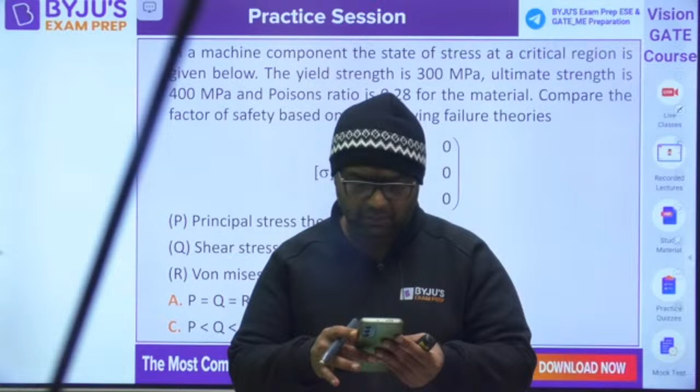Okay guys, so this is the very first question. And this question is saying guys, yes Darshan. Okay, this is the very first question.

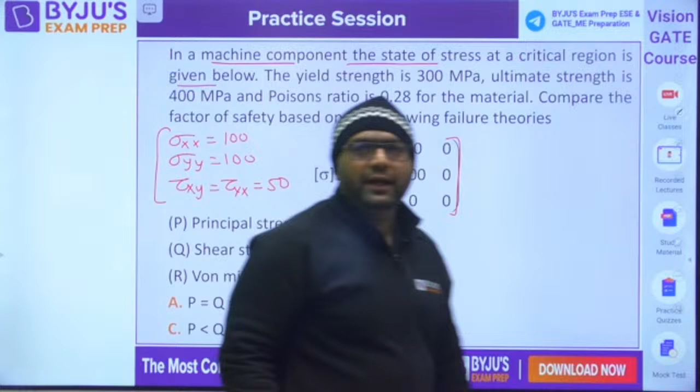In a machine component, the state of stress at a critical region is given below. This is the stress tensor given to you. From here you can say sigma xx is equal to 100, sigma yy is equal to 100, tau xy is equal to tau yx is equal to 50. This is given to you. Poisson ratio is 0.28, SYT is 300, SUT is 400. Compare the factor of safety based on the following theories of failure.

So solve this question. In this case, sigma 1 is 100. You are saying sigma 1 is 100. Let me check, I have solved it for you.

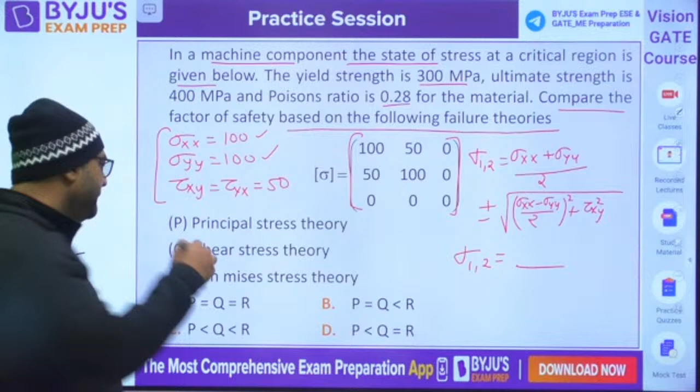No Darshan, Rishabh, your answer is not correct. Because here sigma xx and sigma yy are 100. So you need to find out sigma 1, 2 by the formula, which is nothing but sigma xx plus sigma yy by 2, plus minus square root of sigma xx minus sigma yy by 2 whole square plus tau xy whole square. When you solve this, you will get the value of sigma 1, 2, and once you get these values, you can check the factor of safety for all three theories of failure. Just try to solve it, this is a wonderful question on theory of failure where they are going to check you on all theories of failure at once: principal stress theory, shear stress theory, and von Mises theory. So very easily you can answer it.

Yes, solve it guys. Solve it, solve it, solve it.

Everybody, if you get principal stresses, you will get the answer very easily. You need to understand: if principal stresses are of same nature, then MPST and MSST become the same. So if MPST and MSST become the same, their factor of safety will also be same. So you just need to check.

Yes, like Vinay already answered, you are going to get sigma 1 comma 2 as 150 and 50, and you can see they are of same nature. Same nature of principal stress indicates the same result for MPST and MSST. It means factor of safety coming from MPST and MSST is same. So P is equal to Q. Either answer is A or B. And if you know something about von Mises, you can directly answer from here.

Very good, guys. Very good, very good, very good.

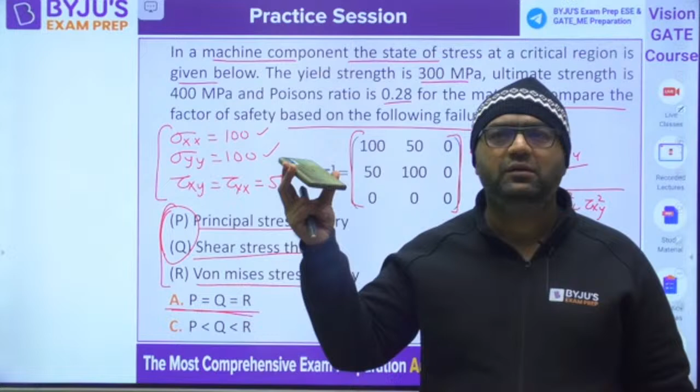Please tell me, B is the right answer. Okay, so the answer would be B.

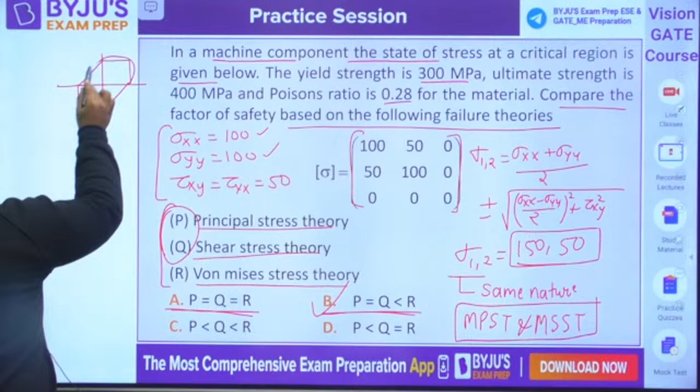Why B, my dear? Because when we talk about the von Mises theory, going for the theory of failure, MSST comes out like this, and when we make MDET, it comes out like this. So you know MSST is safest but uneconomic, and MDET is the economical theory. So the factor of safety when you find it out with MDET, it will give you a value of 2.26. And when you find it out from MPST and MSST, you will be getting 2.

So the answer is going to be B, because the factor of safety, I feel, is going to be more than 2. So whenever we talk about R, it will come out to be more than P and Q. Is it clear for everyone? Yes, very good. So guys, the answer will be B for this.

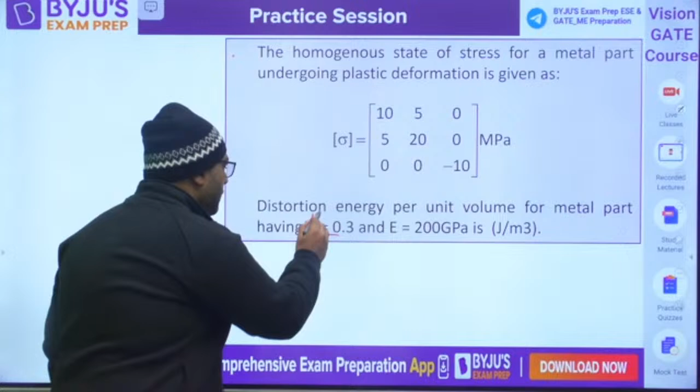Moving to the second question, once again from theory of failure. This time the question says the homogeneous state of stress for a metal part undergoing plastic deformation is given like this. This is the Poisson ratio and this is the Young's modulus, and they are asking for the strain energy, distortion energy per unit volume. So the formula for distortion energy per unit volume is 1 plus mu upon 3E.

If you don't remember, here it is: sigma 1 square, sigma 2 square, sigma 3 square, minus sigma 1 sigma 2, minus sigma 2 sigma 3, minus sigma 1 sigma 3. This is the formula. And if you are talking about sigma 1, sigma 2, sigma 3, you need to find out sigma 1 and sigma 2. But in the third plane shear is already 0, so that itself is sigma 3. But sigma 1, sigma 2 you need to calculate by the formula.

So sigma 1 comma 2 will be sigma xx plus sigma yy by 2, plus minus square root of xx minus yy by 2 squared plus tau xy squared. So from here, you know sigma xx is 10, sigma yy is 20, by 2 plus minus square root of 10 minus 20 by 2 squared plus 5 squared. So from here you would find out the principal stresses. Solve it and get the answer.

Solve it and get the answer.

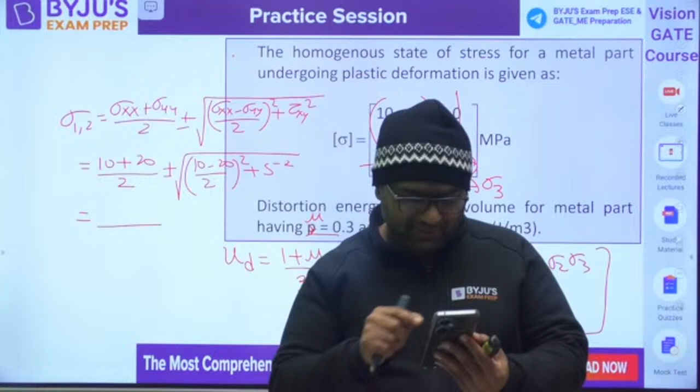Because at night, we are meeting here in the winters. This shows your and my dedication, and with that dedication we are going to crack the exam very nicely.

Okay, 22.07 you are saying, dear, not correct. Okay, you are giving the principal stresses value. Are you giving principal stresses value as 22.07?

Yes, Shreyas. If you are saying principal stresses, then maybe you are correct. Tell me guys, fine, then fine. Okay, one value you are getting is 22.07. What about the other?

What about others? Okay, the second value is 7.93. Then the third value is -10. Use the values, get the answer.

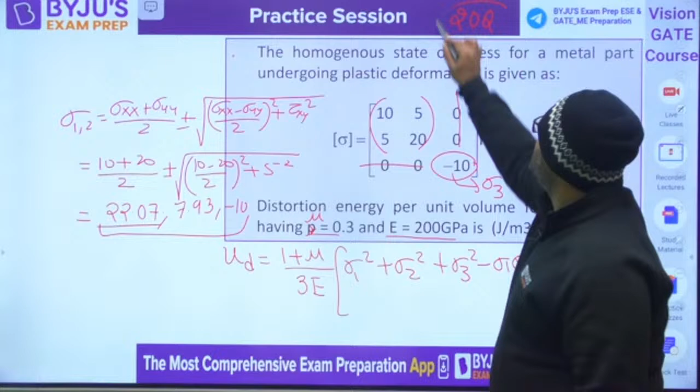We have questions from all the chapters, in the sequence of the chapters only. First theory of failure, 2 questions. Then fatigue loading, 2 questions. Then joints, bearings, and theory of machines questions. We will have 20 questions total tonight. So just solve it and get the answer.

So we have sigma 1, sigma 2, sigma 3. Just put the values to get the distortion energy per unit volume. This is how you will be solving it.

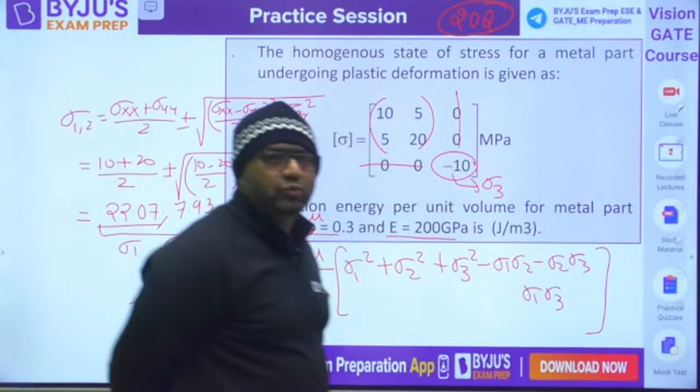The answer is correct. 1679 joules is correct. Okay, Ram Yadav, in my Telegram channel, just 2 days back I have taken the machine design marathon. There I have given all the formulas. You can just download that PDF, you will get that. Okay, fine, still if you want, I am writing 2 formulas.

Total strain energy per unit volume was 1/2E times sigma 1 square, sigma 2 square, sigma 3 square, minus 2 mu times sigma 1 sigma 2, sigma 2 sigma 3, sigma 1 sigma 3. This was the formula for total strain energy per unit volume. Distortion energy is 1 plus mu by 3E, which I have just written. But this has many formats. In the marathon session, I have written all the available formats, so you can go for that.

Fine, moving further, guys. Very good, 1679 is correct. This is fatigue loading chapter. It says a rotating beam test specimen when loaded to a stress of 900 MPa gives a life of 1000 cycles. So you know the S-N diagram. Everybody knows the S-N diagram. This question is from the S-N diagram.

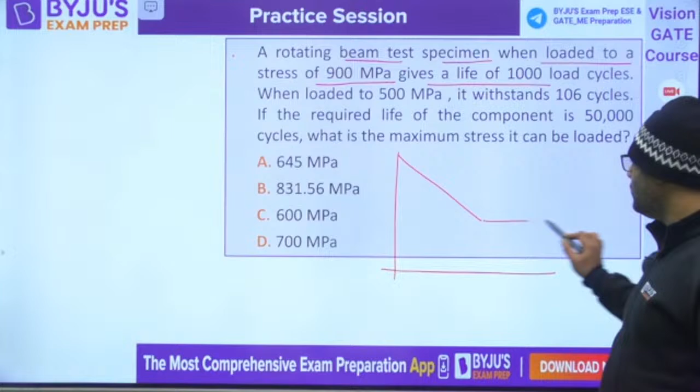So if you remember, what was this? This was log base 10. They have given 900, put direct values. This is 3, this is 6. And they have given when loaded at 500 MPa, 10 to the power 6 cycles. So this is 500.

Log base 10 of 500. And they are asking the stress for the life of 50,000. You need to find out this. Log base 10 sigma. If this is log base 10 of 50,000.

Solve it and get the answer. Solve it and get the answer. You know what you need to do. This is A, B, C, D, E.

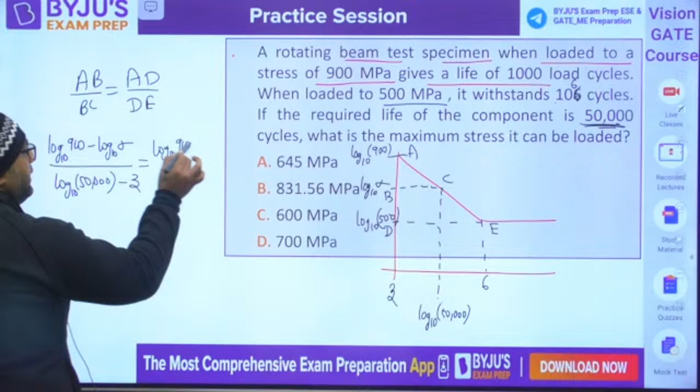You will go for similar triangles. You will write AB by BC equals AD by DE. So AB is nothing but log base 10 of 900 minus log base 10 of sigma, divided by log base 10 of 50,000 minus 3. It equals log base 10 of 900 minus log base 10 of 500, divided by 6 minus 3.

So this will give you the value of sigma. This will give you the value of sigma. So the answer comes for sigma as 645 MPa. That is correct, very good guys. I am very happy that in the very beginning you have given the answer. Shreyas, very good. Wonderful. 645 MPa is correct, very good Ram Yadav.

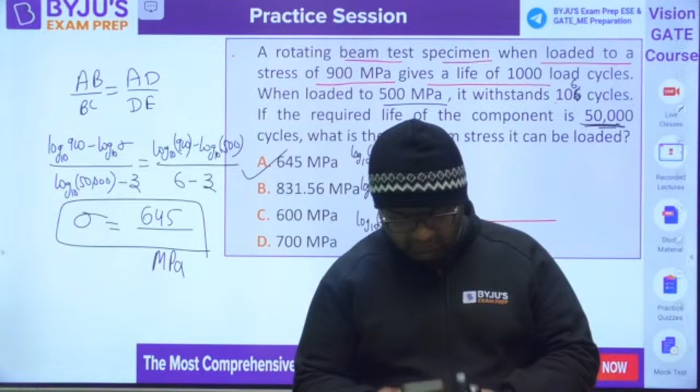Yes, very good. Answer is correct, guys. Moving to the next question, guys.

This is one more question from fatigue loading. This question is saying a steel component has the following: ultimate strength, yield strength, surface finish factor, size factor, reliability factor, concentration factor. Find out the endurance strength of the component.

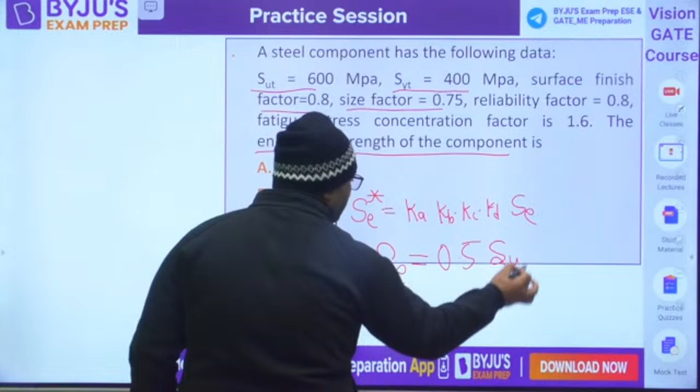I would like to tell you guys, they have asked you the corrected endurance strength. Corrected endurance strength is given as Ka times Kb times Kc times Kd times the endurance strength. And endurance strength, if not mentioned for steel, it is 0.5 times of ultimate strength. So this is for steel, okay? So you can use it and all other factors are given to you.

And you know Kd is nothing but 1 upon Kf. Kf is the actual stress concentration factor. Actual stress concentration factor. Solve it and get the answer, guys.

Wonderful. Okay, so Rohan is saying 144. What about others? I feel there is a scope of improvement. Vinay is saying 90, very good. What about others? Shreyas is also saying 90. Yes, 90 is the right answer.

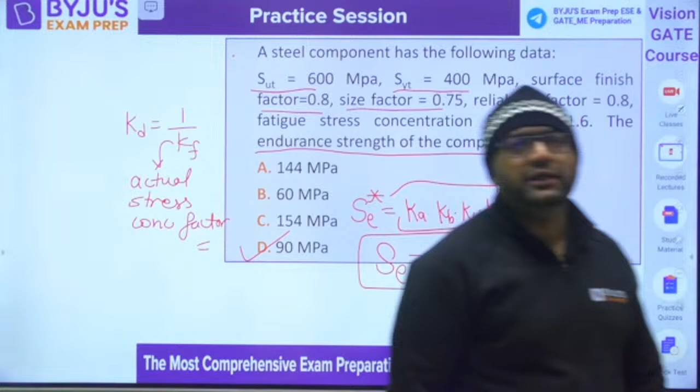Okay, if you remember, I told you all factors are less than 1. All factors are always less than 1. They are never going to be more than 1. Very good, Darshan. The answer is D, which is correct. Very good. So moving further, guys, to the next question.

I feel now one question should be from Miner's rule. I have not taken the Soderberg-Goodman because that question we have already done in the class. So the life of a machine component under heavy test was 10 hours. So you know that capital N1 is 10 hours.

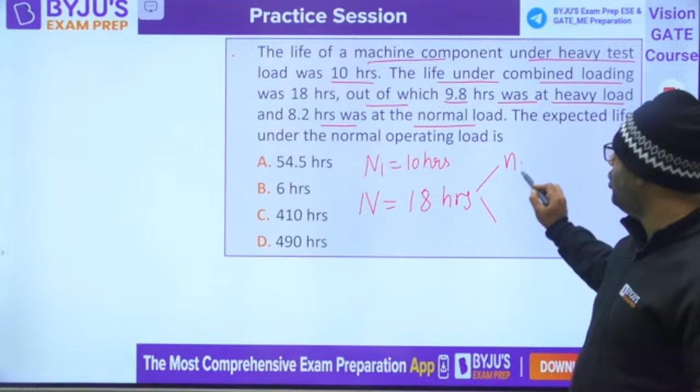The life under combined loading was 18 hours, out of which 9.8 hours was at heavy load, 8.2 hours at normal load. So they are saying the total life N is 18 hours, out of which small n1 is 9.8, small n2 is 8.2. So you just need to write one thing, that is n1 by N1 plus n2 by N2 is equals to 1.

Okay, so small n1, small n2 are known to you. You need to find out the capital N2. This is cumulative fatigue failure or Miner's rule. This is a new type of question which I have never asked in the GATE paper. So you may get this time, GATE 24, this question. Try to solve it.

And after this question, we will move on to the rivets, riveted joints. Tell me guys, I have taken 2 questions from riveted joints.

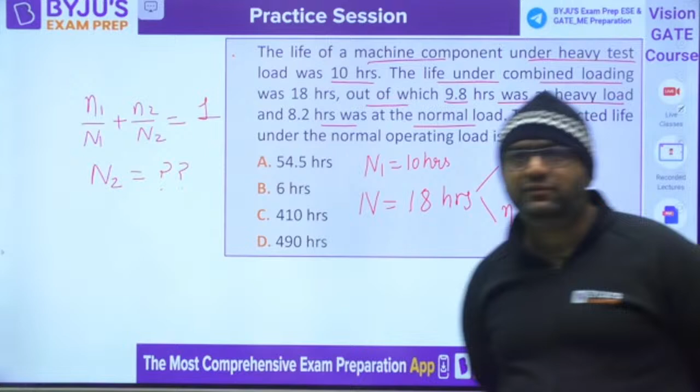Okay, Vinay is saying C, 410 hours. What about others? Very good Rohan, very good Shreyas. 410 hours is correct. C is the right answer. So N2 will be coming out to be 410 hours.

Moving to the next question guys. This is riveted joint. I told you generally 2-3 rivet configuration can also come. So one question from 2 rivet configuration. Next will be for 4 rivet configuration.

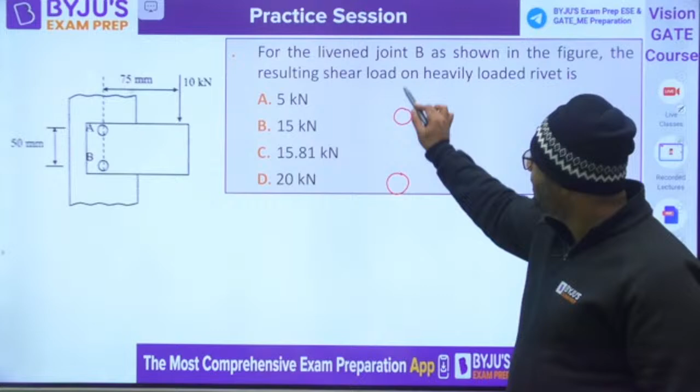Okay, so here my dear, you need to solve it. You know what to do, what are the steps. So this is rivet number 1, this is rivet number 2. This is the row of rivets, the gauge line. And you know when I will be making the load, it is acting here.

So I will be making one load here, other load here. This and this will be making a couple. So finally what I will be having, I will be having one force and one couple. Force will be of 10 kilonewton and couple will be of 10 kilonewton into 75 mm.

Now you know what to do. Primary forces, secondary forces. I feel everybody knows what is primary force. It is going to be 10 by 2. So there is no problem with the primary force. You need to find out secondary.

You know what is the procedure to write secondary. First of all, primary will be nothing but acting like this. For secondary, the procedure is radius perpendicular. So for that, I would be going like this. This is the centroid. So radius perpendicular, radius perpendicular.

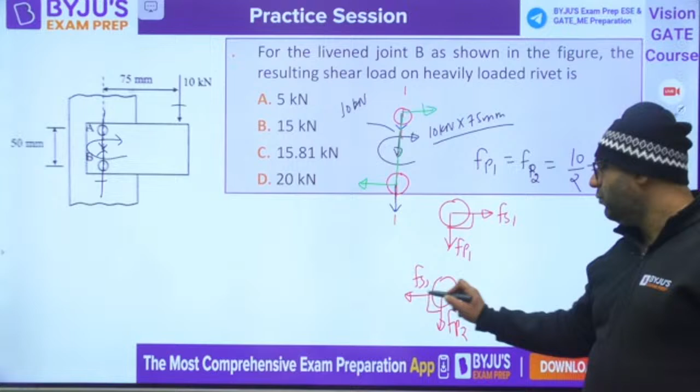So if I would be writing both the rivets separately, first rivet will be having this as primary, this as secondary. Second rivet is having this as primary, this as secondary. So both the rivets have 2 forces like this. So you know this is F primary 1, this is F secondary 1, F primary 2, F secondary 2. What is the formula for secondary? As because of symmetry, R is common for both. So that is why both the secondary forces will be equal.

So you can write F secondary 1, F secondary 2 equals P into E into R by R1 square plus R2 square. As R1 and R2 are equal to R, you can also write it as P into E into R by 2R square. R will get cancelled out, and you will find the secondary force.

Very good, Ram Yadav and Shreyas. After getting primary and secondary, resultant is nothing but primary ka square plus secondary ka square. I feel you would get the answer to be 15.81, because secondary will come out to be 15 kilonewton. So resultant will be...

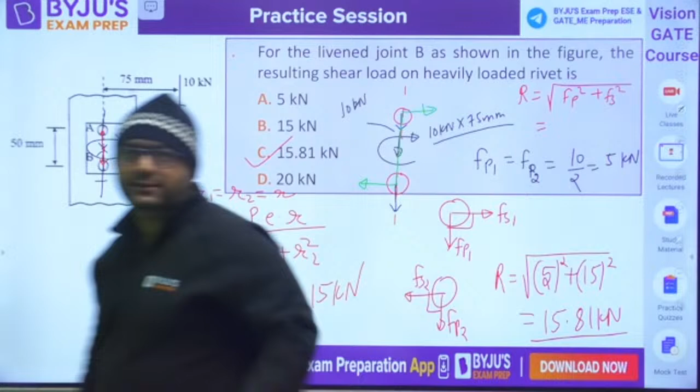Wonderful guys, very good, very well done.

So moving further guys, next question. A bracket is fitted to the channel with 4 bolts. These are 4 bolts: 1, 2, 3, 4. The dimensions A equals B equals 150 mm. Eccentricity is 300 mm. The allowable shear stress of the bolt is 40 MPa, and they are asking for the resultant maximum shear load.

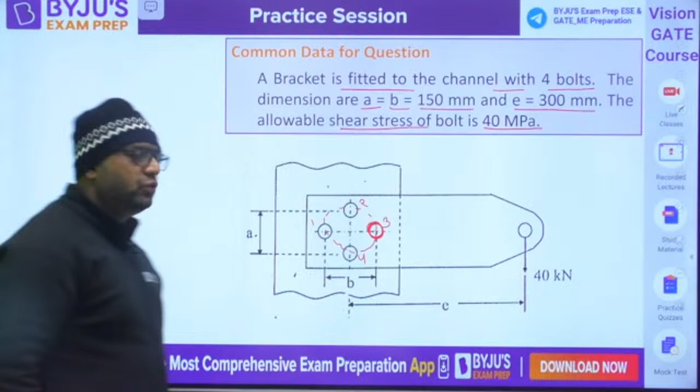Once again you need to find out the similar thing. They have given you everything, and they are asking for the resultant maximum load. You know this rivet is nearer to the load, so maximum will be coming here, and you can feel them as on the periphery of a circle. So it is very easy to do this.

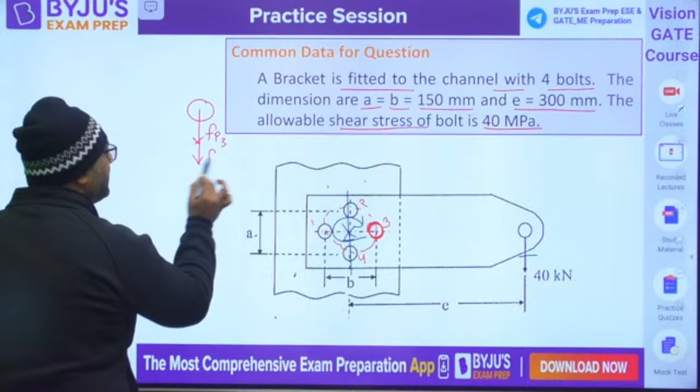Okay, solve this, I'll tell you how to start. First, here you make one force downward, other force upward. This and this will make a couple like this. We are majorly concentrated on the third rivet only. For the third rivet, if you look, this will be the primary, and secondary also will go in the downward direction. So this is F primary of 3, this is F secondary of 3, because the radius perpendicular is coming this way.

And F primary 3 will be 40 by 4, 10 kilonewton. And F secondary of 3 is P into E into R3 by R1 square plus R2 square plus R3 square plus R4 square. All R1, R2, R3, R4 are equal.

Fs3 will be P into E into R by 4R square, so you would get the value of secondary force. After getting them, resultant is nothing but F primary 3 plus F secondary 3, because both are in the same direction, so directly resultant will come out.

Okay, 50 kilonewton you are saying. It means you are saying the answer is D. Very good, Ram Yadav. So according to Ram Yadav, the answer is D. Let us see what others say. So the answer Ram Yadav is saying is D.

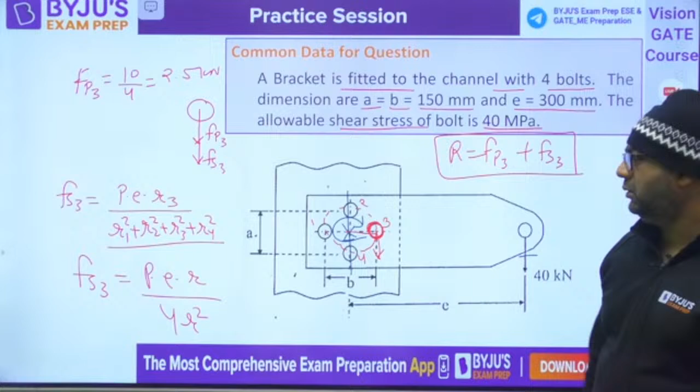Let us see what others say. Okay, this is 40 kilonewton, I have done it wrong. 40 by 4 is 10 kilonewton, primary is 10. If you are getting secondary 40, then 50 is correct. Very good, Rohan, and yes it is correct. Secondary will come out to be 40 kilonewton, so when we add 40 kilonewton plus 10 kilonewton, the net will be 50 kilonewton.

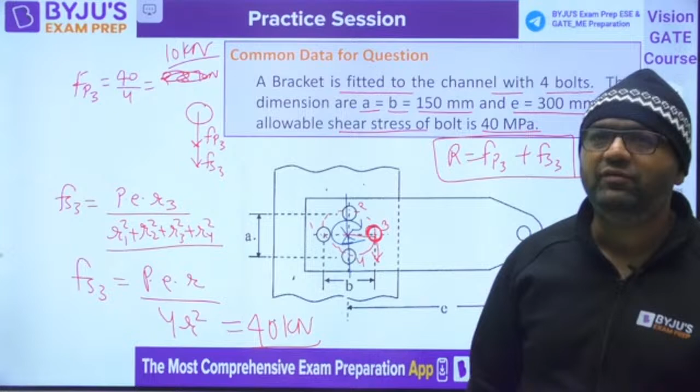Arey bhai, they have given A and B na, R will be A by 2 or B by 2, can you see this? A and B are equal, so it is 75 mm. Very good, Shreyas, Rishabh, very well done. Vinay, very well done. So whatever you guys are saying, that is the correct answer, and the answer is yes, 50 kilonewton.

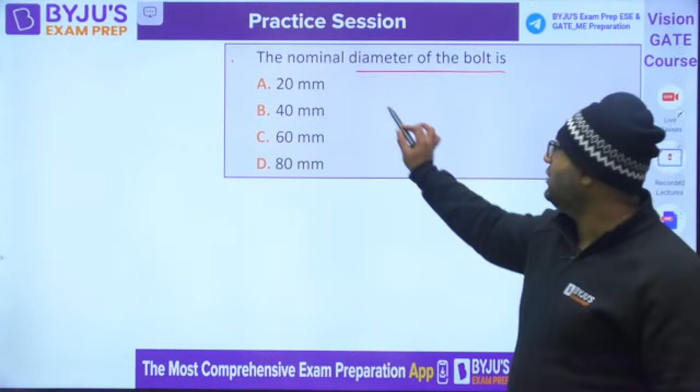Very good, so guys moving to the next question. For the same question, they are asking the nominal diameter. So for that, you know tau max. Tau max will be R max by pi by 4 dr square, that should be less than or equal to tau permissible. Let us see, they have given tau permissible.

Yes, they have given 40 MPa. So this is 40. So 50 into 10 power 3 divided by pi by 4 dr square, less than or equal to 40. This will give you dr more than or equal to this. Is it clear for everyone?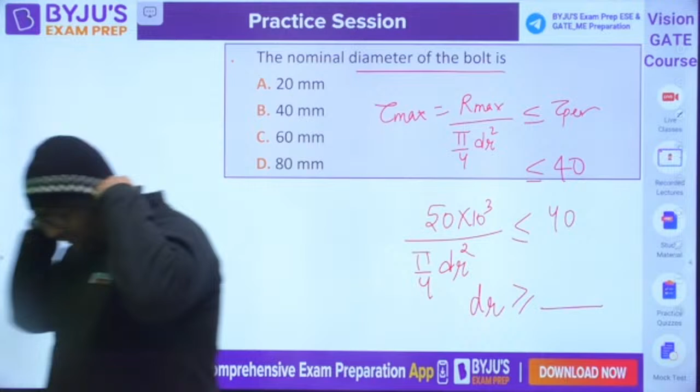Okay, Shreya is saying B for that, what about others? Okay, already you guys have answered. 39.89 is correct, 39.89, yes, you can say D is... B is correct.

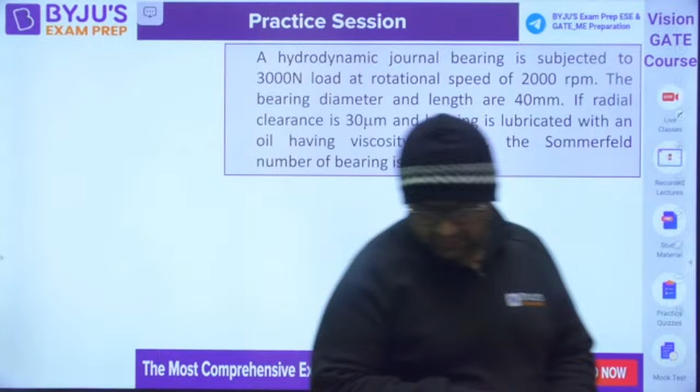Next question is on bearing. You guys are outstanding. We have done the questions from 3 topics. Now this is question number 8 for the session: Sommerfeld number.

Z into N by P, D by C, you know Z is the viscosity. This is RPM given, so N will be N by 60. Pressure is W by LD. Put the values accordingly. Sommerfeld number, very important question.

All the parameters are given to you. After Sommerfeld number, the next question we have is on the life of bearing. Two questions from the ball bearings, then we will be having the next question from the brakes, and then we have theory of machines questions. Total around approximately 20 questions are there. We are still at question number 8.

Yes, tell me guys, tell me. Don't worry, tomorrow's session will not be midnight. Tomorrow's session will be in the daytime. Yes guys.

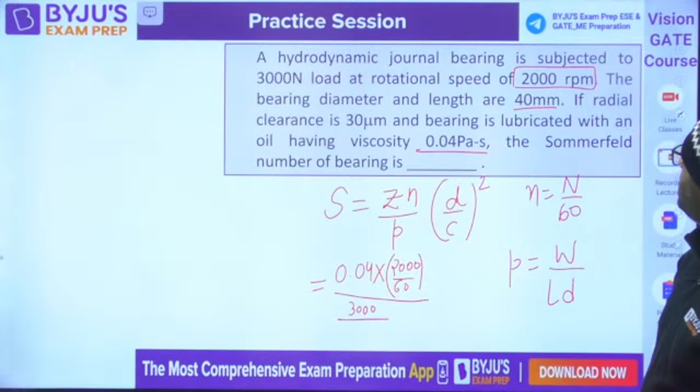You would be having viscosity as 0.04 Pascal second. Then it is 2000 by 60. Load 3000 upon L 40 mm, okay they are equal, 40 cross 40 into 10 to the power 6.

You have forgotten to do 10 power 6, I feel so. Okay you need to find out now. So Sommerfeld number is 0.04 into 2000 divided by 60, 3000 upon 1600 into 10 power 6. I feel when you will be doing all this, the answer should come around 0.47. According to my calculation it is coming 0.47. Maybe I have done some mistake, please cross check.

What they have given is the radial clearance, okay they have given the radial clearance. D by C also you will be doing, so diameter is 40. Radial clearance have to be doubled, 60 into 10 power minus 3. Why 60? Because if this is diameter, you need to consider diametral clearance, and they have given you radial clearance. Please check it, maybe I am wrong here because this is my calculation. Okay I am right now.

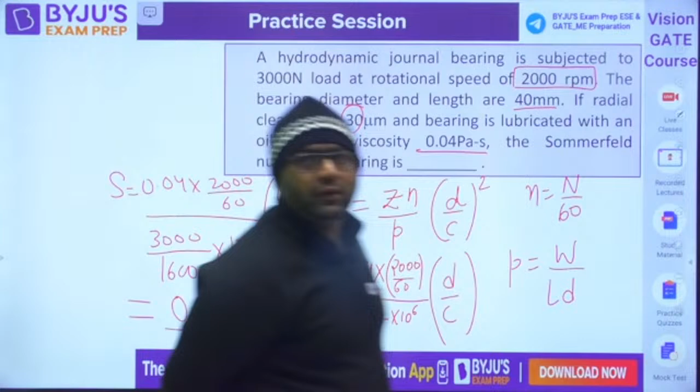You should be much better than me in calculations because you are going to give exam. Okay, Vinay is getting 0.316. What about others? If others are also getting the same, then maybe you guys are correct. Let us see, everybody is getting the same. This is 0.04.

Arey bhai, this is also in mm na? This is also in mm. So that's why I have done 10 power minus 3 so that mm get cancelled out. And you need to do square of that also, okay square of that also.

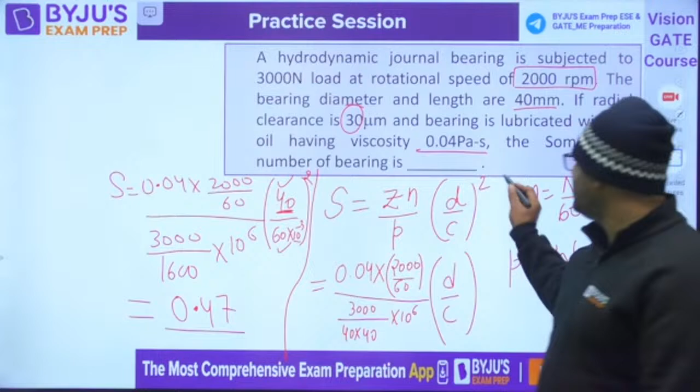Darshan is getting 0.047, okay that may be the correct answer, 0.047. That mistake I may have done. Please check it, either you are getting 0.47 or not, this is square also if you have forgotten that. Shreyas is also getting the same. So 0.047 is correct, yes that mistake I can have. 0.047 is fine, so either 0.047 or 0.47. So majority of you are saying 0.047, fine.

Okay so, you understood your mistake? You understood your mistake? No, Ram Yadav, 0.316 is not correct, you are doing some mistake. Either you have not done the square of this. Okay so these mistakes may lead to the wrong answer. So I feel you and Vinay have done the same mistake, Ram and Vinay, you guys have done the same mistake. So answer is not 0.316, that is for sure. So you can check either it is 0.47 or 0.047 from the calculation.

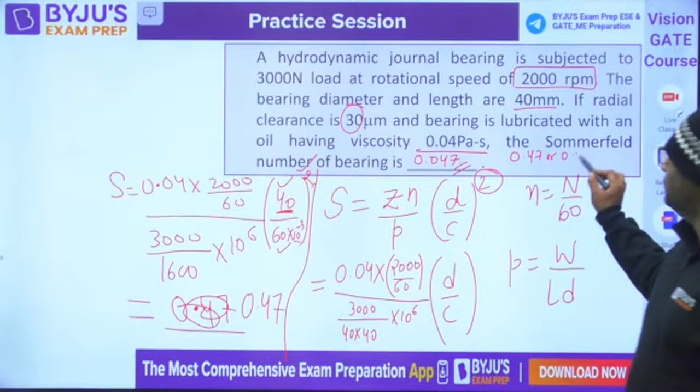I don't have calculator right now. Okay fine. Next question, will you do na? Everybody, shall it? Is it fine? Shall we move on?

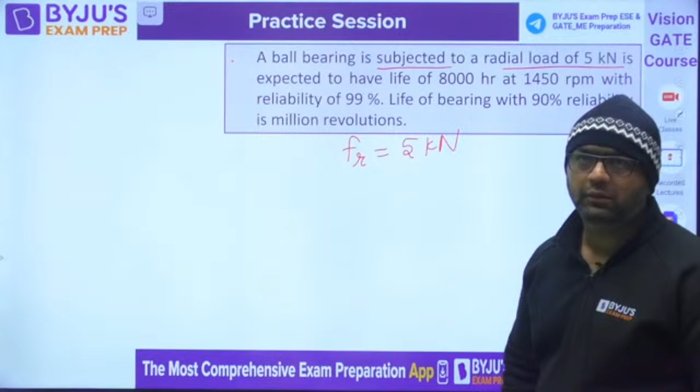A ball bearing is subjected to a radial load of 5 kilonewton, is expected to have a life of 8,000 hours at 1450 RPM with reliability of 99%. You need to find out it for 90% reliability.

Okay so you know what to do for this. L99 by L90, it is ln 1 by 0.99, ln 1 by 0.9, 1 by 1.17. And here L99 is 8,000 into 60 into 1450 divided by 10 to the power 6. Solve it and get the answer, guys.

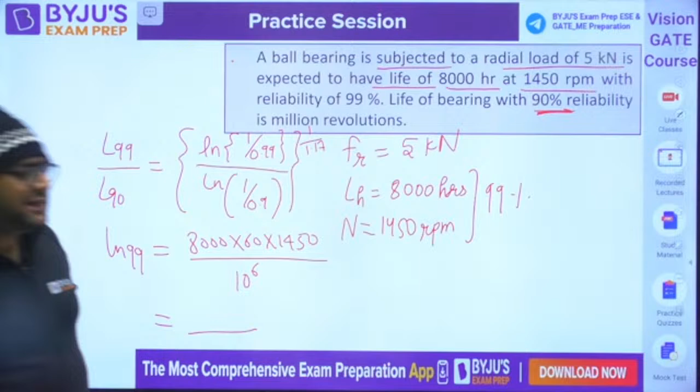This is from ball bearing, deep groove ball bearing. Tell me guys, tell me. And from theory of machines, I have taken questions only from those topics which we have done in the marathon, okay?

पिछले क्वेश्चन में 316 आ रहा है। ओके, जहां तक मैंने कैलकुलेशन किया, मैं एक बार चेक कर लेता हूं। लेट मी चेक माय कैलकुलेशंस।

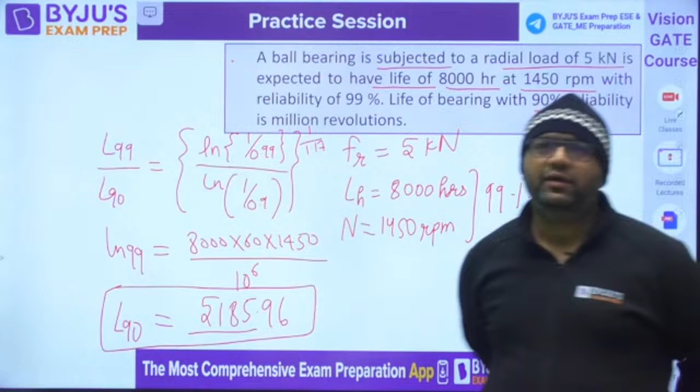अब बात करते हैं इस क्वेश्चन की। इस क्वेश्चन का जो दर्शन ने दिया है वो सही है, 5185.96। दिस इज L90, क्योंकि आपको नंबर ऑफ मिलियन रिवॉल्यूशन में ही चाहिए है। 5185 बिल्कुल सही है, इतना आप चेक करो। पिछले क्वेश्चन का आंसर मैं आपको कमेंट सेक्शन में फिर से बताऊंगा, अगर 0.316 है तो उसको करेक्ट करेंगे। कैलकुलेशन मिस्टेक किसी से भी हो सकती है, जो कि पेपर में नहीं होनी चाहिए आपसे, ठीक है।

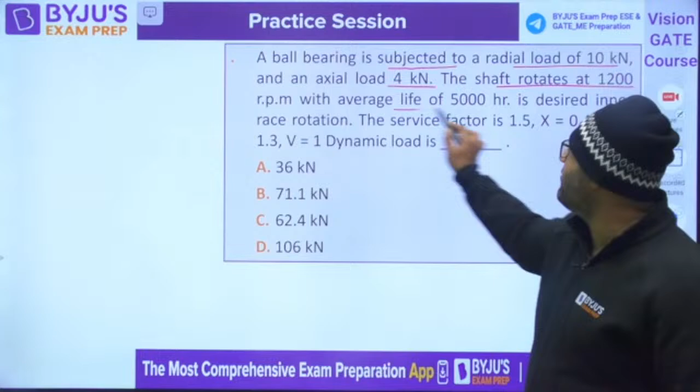Moving further, we will do one more question on ball bearing. Here a ball bearing is subjected to a radial load of 10 kilonewton and axial load of 4 kilonewton. The shaft rotates at 1200 rpm. Average life is desired for inner race rotation. The service factor is 1.5. X is this, Y is this, dynamic load is this. So you know PE is nothing but X into FR plus Y times FA.

ठीक है, this is nothing but the value of PE into service factor. You just need to find out this equivalent radial load. And after this question, we have one question from brakes. Yes.

Solve it. You know, for inner race rotation, V is 1. V is 1.2 for outer race rotation.

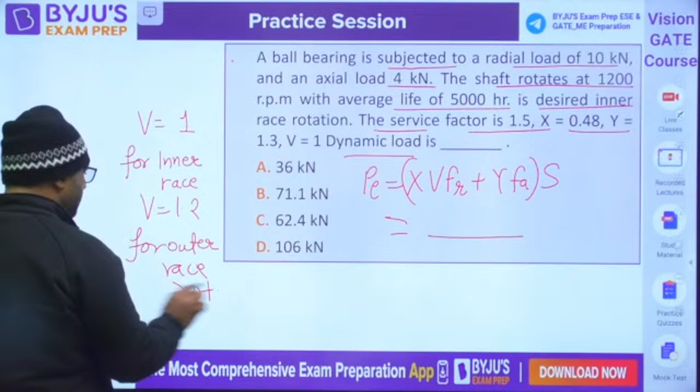अरित्रो, आपकी कैलकुलेशन मिस्टेक है, आपने उसको आरपीएम कन्वर्ट नहीं किया रिवॉल्यूशंस में। इन द लास्ट क्वेश्चन यू हैव टू कन्वर्ट इट इनटू, यहाँ पे ऐसे कन्वर्ट किया था, हैव यू डन दिस? दे आर आस्किंग यू इन मिलियन रिवॉल्यूशंस। फर्स्ट ऑफ ऑल यू विल कन्वर्ट इट, and then you will put it here, then you will find out L90. If you will take this life as 8000 hours, you will not get the right answer. They are not asking in hours, they are asking in million revolution. Okay, so you have found out in hours.

What about this? X value is 0.48 into 1 into 10. Y is 1.3 into 4.

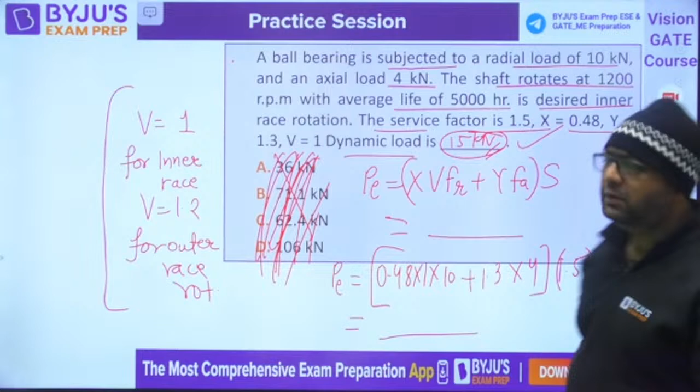Very good. So moving further, Aritro, I feel you understood. ये भाई कई बार टाइपिस्ट लोग कर देते हैं यार, एक की ऑप्शन दूसरे में डाल देते हैं, ठीक है। ओके, शैल वी मूव ऑन?

Yes, Ram, are you getting 15 kilonewton, or what is 106? Are you not getting 15 kilonewton? It is 0.48 into 10 plus 1.3 into 4 into 1.5. So I feel you would be getting 15 kilonewton. Ram Yadav, are you getting it or not? Please tell me that.

Okay, very good. So moving further, guys.

Okay, I feel what you have calculated is dynamic load carrying capacity. PE times L90 to the power 1 by 3 is equals to C. If you will find out C, that may be coming out to be 106. Yes or no? Actually, this was the second part of that question, which I have not taken actually. Am I correct, Ram Yadav? Have you calculated dynamic load carrying capacity?

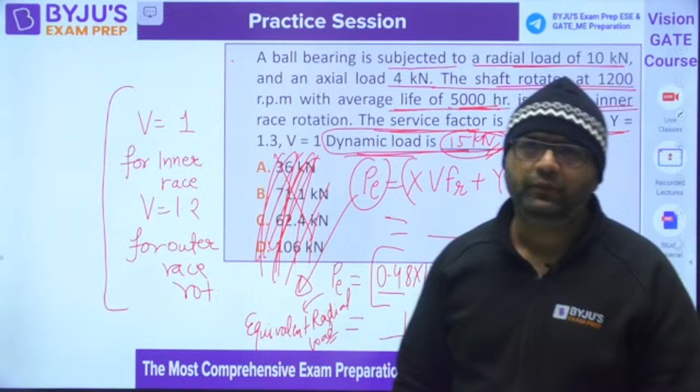Yes. Question is saying the dynamic load is: a ball bearing is subjected to a radial load of this, axial load of this, the shaft rotates at 1200 rpm, average life desired inner race, the service factor is 1.5, dynamic load is, this is said to be actually equivalent radial load. So dynamic load carrying capacity is different. So when we are talking about dynamic load carrying capacity, it is 106 kilonewton. But actually I am telling you this question was having both the things. The second part of this was dynamic load carrying capacity. It is said to be equivalent radial load. Okay, so PE is coming out to be 15 kilonewton. ठीक है भाई, this is equivalent radial load, I am telling you PE is equivalent radial load. And C is also known as dynamic load carrying capacity.

Everybody remember the second name of C, that is catalog rating. Sometimes they are also using the word catalog rating. If they ask you catalog rating, then also you need to find out C only.

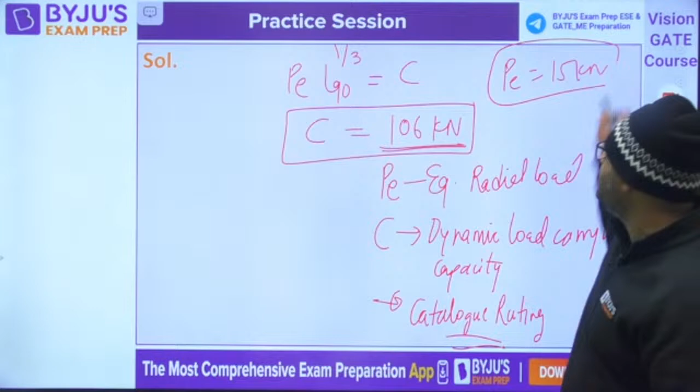So when you will be finding out equivalent radial load, it is coming out to be 15 kilonewton. And when you go for dynamic load carrying capacity, it will be coming out to be 106 kilonewton. That's why the options for the second question have been taken here.

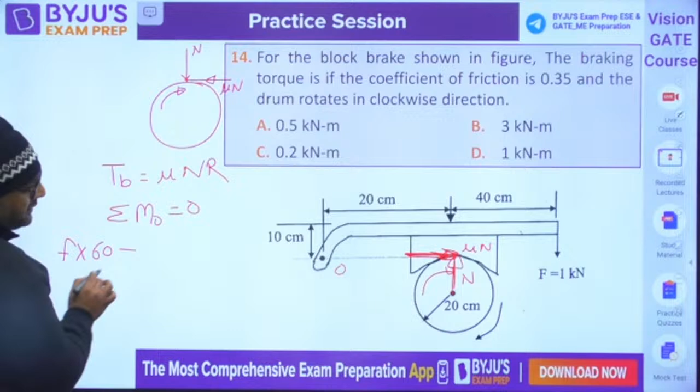Then this normal reaction N into 20. And that mu N is passing from here only, so it is equals to zero. This will give you the value of N. Put it here, you will get the braking torque. Solve this question, get the answer.

After this question, we have a question from Theory of Machines. From Tom, we have a question from simple mechanism, velocity and acceleration analysis. Solve it, guys.

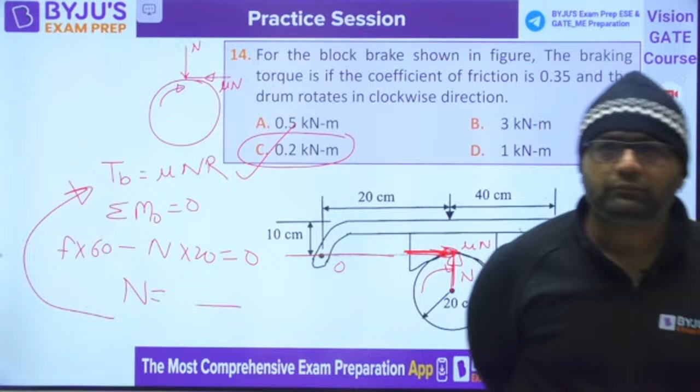Okay, very good. Point 2 is correct. C is correct. Yes, Shubham. Are you asking or telling? Okay, question is C, answer is C. Very good, Krishna.

Clear for everyone? Shall we move on to the theory of machines now? Or one more question is there for brakes. After that we will move.

Very good, Vinay, Krishna. Wonderful. Ram Yadav, what is the answer? Tell me. Great. Next question.

A differential band brake as shown in the figure has torque capacity of 3000 Newton meter. The thickness of the steel band is 3 mm and the maximum tensile stress is given. The coefficient of friction between the friction lining and the brake drum is given. So you know T1 by T2 is e to the power mu theta. T1 minus T2 into R is equals to braking torque, which is 3000. Using these two equations, we can easily find out T1, T2. This question is from the design of belt.

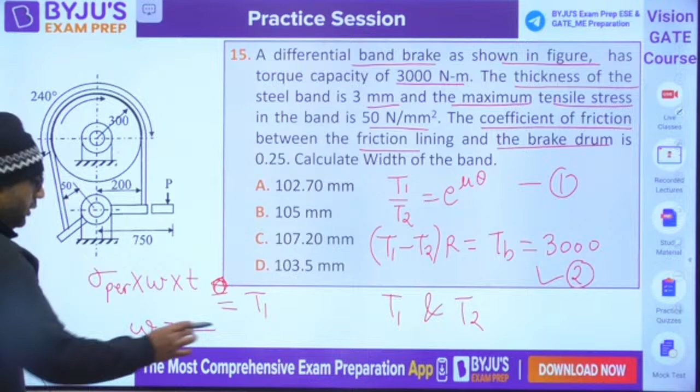So you can write the stress into width into thickness is less than equals to, or you can directly take equals to T1. This will give you the unknown width W, because whenever we are talking about band, this band is having some thickness like that. So W is the width, T is the thickness. This is the area on which tension is acting. That is why we are using it like that.

Last question. How much is theta? Is it not mentioned in the question? The coefficient of friction is given, but theta is not given. If it is not given, 240 is mentioned here.

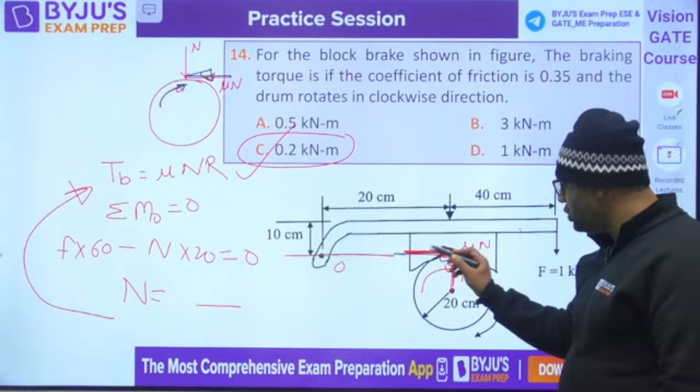Sumit, whenever you know the direction of rotation is this, then you know the brake should be applied in this direction to stop it. So obviously this side tension will be more, this side tension will be less. Is this what you are asking, or are you asking about the previous case? Here it is rotating like this, so friction will be opposite. And if on the drum it is like this, on the shoe it is like this, because by Newton's third law of motion. This is on the shoe, this is on the drum.

Okay, you are saying C is the answer. What about others? I am waiting for others to answer this question, then we will move on to the next. Definitely yes.

Sumit, you are not attending the classes. Today you were not there in the gears class. Tomorrow is the last class. Solve this, guys, solve this. Yes, Vinay is saying A. Okay, semester exam is going on.

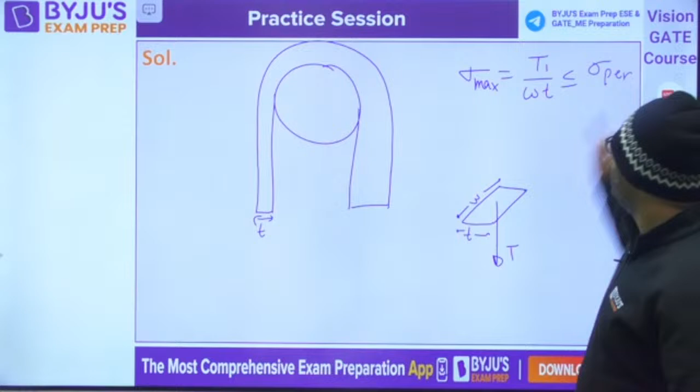So this is thickness, this is width. This is how we will do the design. Sigma will be coming out to be T1 by WT. This is sigma max, should be less than or equal to sigma permissible. So T1 is less than or equal to WT sigma permissible.

Theory of machines question, very simple. I want everybody to do this. This is from the very basic definition of general motion.

Yes, solve it guys. Ron is saying C. Dear, just look at it. They are saying parallelogram.

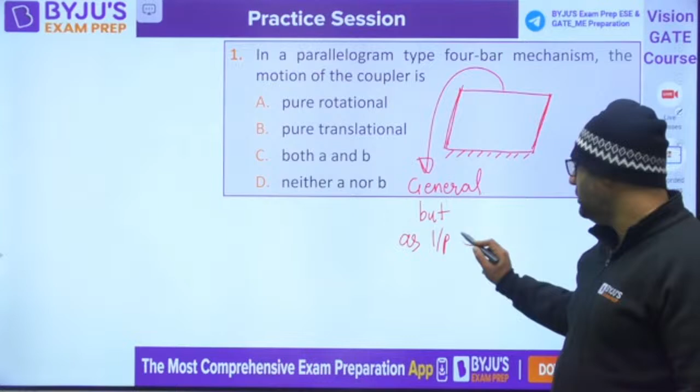In parallelogram, this link and this link are always parallel. And when this link and this link are parallel, what is the motion of this? Generally, this is general, but as input and output are parallel, so it would be pure translation. Ram Yadav, you understood? Pure rotation, pure translation. Why? The reason is velocity of every point would be same.

B is the right answer. Every point will be having the same velocity. Like you have this case, if you remember, we have done it. So every point on this link was having same velocity. Okay? Very good, moving further to the next question.

This is from degrees of freedom. And I have not done any hatching in this, so it means everything is a link. Link 1, link 2, link 3, link 4, link 5, link 6, 7, 8, 9, 1. Solve it and get the answer.

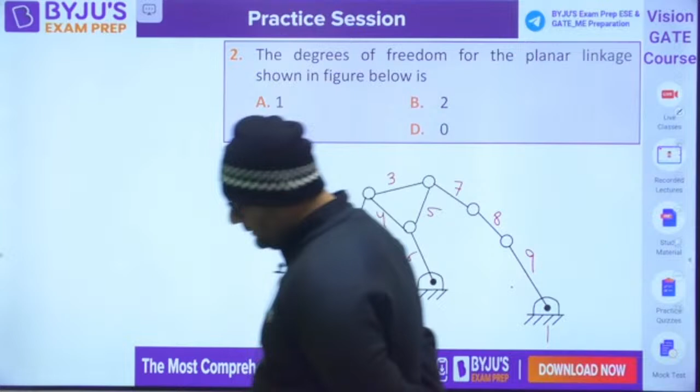Find out the answer, guys. Okay, Ram Yadav is saying 2 is the answer. Sumit is also saying 2. Rohan is also saying 2. And 2 is the right answer.

So when you will be finding out, the number of links are 9. This is a binary joint, this is a binary joint, this is a binary joint, this is a binary joint, this is a binary joint, this is a binary joint, binary joint. 7. Degree of freedom is 3 into 9 minus 1 minus 2 into 7. There is no higher pair.

Some mistake. 1, 2, 3, 4, 5, 6. This is also 1. 7, 8, 9. 9 binary, 1. Okay, this is also 1 binary. 1, 2, 3, 4. 1, 2, 3, 4. 5, 6, 7, 8. 8. Still some mistake. Is the calculation correct or not?

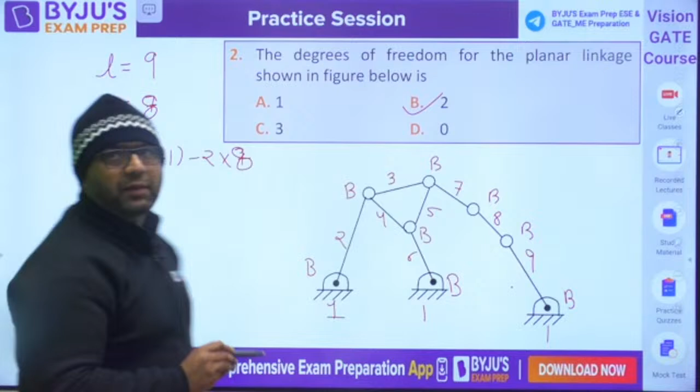Let us see again. Number of links are 9. This is binary, but this is ternary. This is ternary, this is ternary. Binary, binary, binary, binary. So now if you see, 1 ternary, 2 ternary, 3 ternary. 3 ternary means 6 binary. So 7 binary, 8 binary, 9 binary, 10 binary, 11 binary. So joints are 11. Degree of freedom is 3 into 9 minus 1 minus 2 into 11. 24 minus 22. Answer is 2. Moving further guys, very good.

Moving further, moving further. Yes, this question. Crank and slotted lever mechanism. This you know, I feel everybody knows.

Cos alpha by 2, this is the starting point. Cos alpha by 2 is R by L. And then you know alpha you would be getting. Then alpha plus beta is 360. Using this equation, you will get beta, and beta by alpha is your answer. Solve it and get the answer.

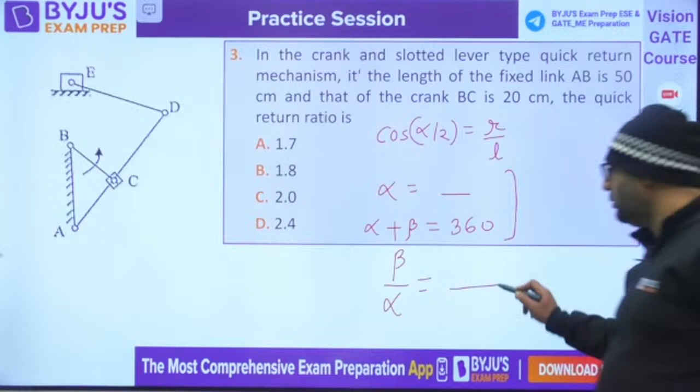Yes guys. Solve it, get your answer. Very good, Rohan. I have given 1.7.

Arithro, I already told you it is not hatched. I already told it is not hatched. 1.7, Rohan is saying 1.7. Everybody, very good, 1.7 is correct.

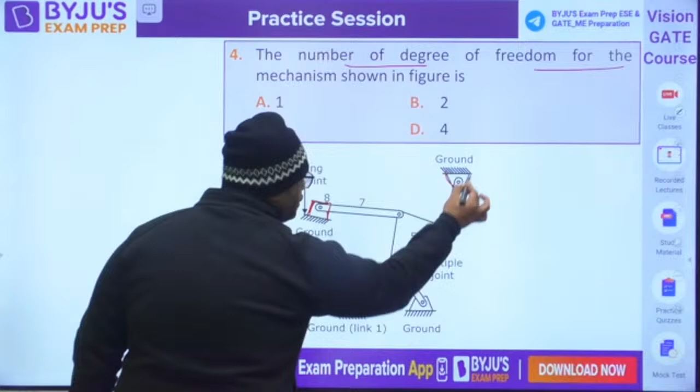Degree of freedom, here mind it. This is a slider. This is a hinge, this is a hinge, this is a hinge. Okay, and this is hatched. They have already mentioned the link number.

So it is very easy for you to solve now. Link numbers are already mentioned. You can see 1, 2, 3, 4, 5, 6, 7, 8. Number of links are 8, it is mentioned. Just you need to do hard work in finding out the number of joints. This is question number 17 going on, 3 more questions to go ahead.

Ram Yadav is saying the answer is 1. Very good. So joint, binary, 1, 2, 3, ternary, 1, 2, binary, binary, 1, 2, 3, ternary. So 1 ternary, 2 ternary, 1, 2, 1, 2, 3, 5, 6, 7, 8, 10.

Degree of freedom. A is the right answer. Very good, guys.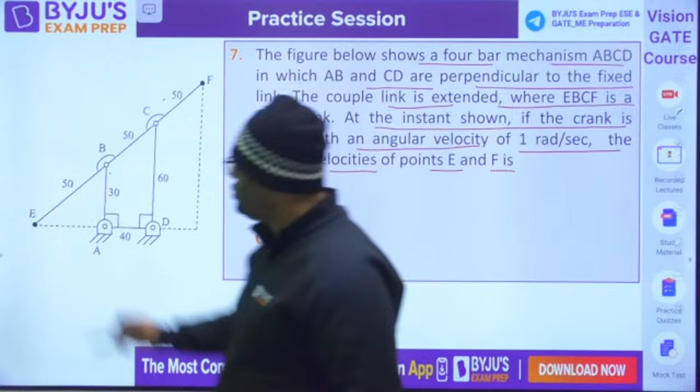Okay, first solve this one. The figure shows a 4-bar mechanism ABCD, which are perpendicular to the fixed link. The coupler is extended, and at the instant shown, if the crank is driven at an angular velocity of 1 radian per second, you need to tell the ratio of velocity of point E and point F at that particular instant. Interesting question.

Sumit is saying A, Vinay C, Darshan C. Rohan is saying 1. Yes, Ram Yadav, what do you say? Krishna says 1.

C is correct. So my dear, first of all, velocity of E and velocity of F is equal, because for this particular configuration, this link is in pure translation. And if it is in pure translation, every point will be having the same velocity. So answer will be 1. C is the correct answer. Is it clear? Yes.

Coriolis. You know the Coriolis component of acceleration is 2v omega.

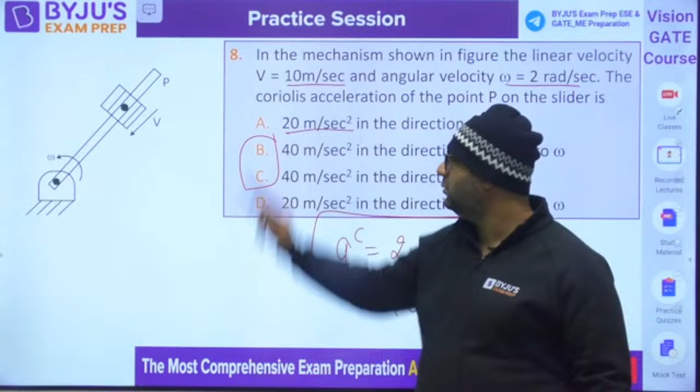So if you are talking about the direction, this is the velocity vector. Just imagine the clock. This is the velocity vector. Omega is the sense, this is anti-clockwise. So you would be going anti-clockwise. Anti-clockwise is this, clockwise is this. Here would be coming.

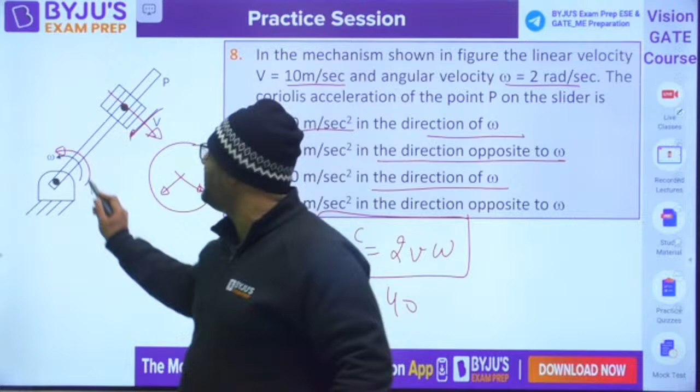So they are asking, is 20 meter in the direction of omega, in the direction opposite to omega, in the direction of omega? So my dear, when they are saying omega, omega doesn't have direction, omega has sense. So actually they are writing wrong language. They should ask in the sense of omega, or opposite to the sense of omega. So we always rotate it in the sense of omega. Because if you talk about the direction of omega, it is outward. Okay, you don't feel that this is the direction of omega and it is going opposite to the direction. No, you have rotated it in the sense of omega. Sense is anti-clockwise. You rotate it anti-clockwise only. So, in the sense of omega. Okay, is it clear? So this mistake you may have.

C would be the right answer. Always feel it is not direction, it is sense. Direction of the vector would be this, outward. This is not direction of omega, this is sense of omega. And if this is sense of omega, they are saying direction, then you have rotated in this direction only, anti-clockwise. C would be the right answer here.

Are you getting here? Many books have done this blunder, so be careful. Moving to the next question. Yes Ram, is it clear? Any doubt? Okay, fine.

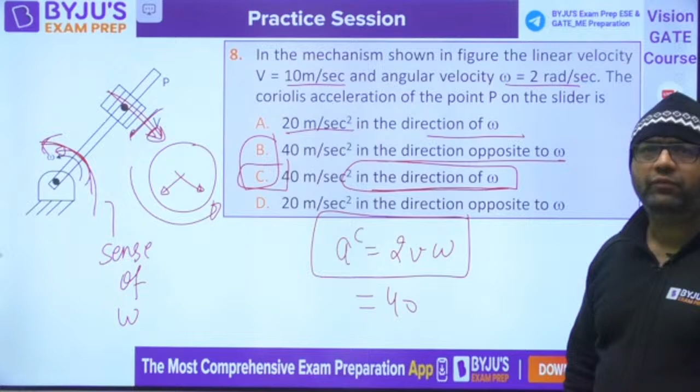Flywheel question, last question, question number 14th. The torque, solve it guys.

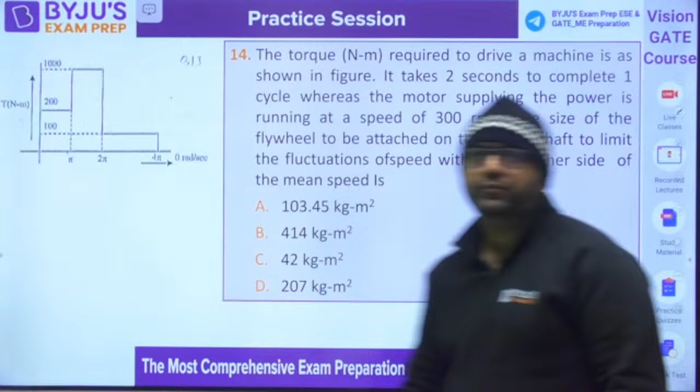Okay, solve it. The T-theta diagram. The torque required to drive a machine is as shown in the figure. It takes 2 seconds to complete one cycle, whereas the motor supplying the power is running at 300 rpm. The size of the flywheel attached to this is given. Solve it within 1% on either side. Okay, solve this question.

They are saying this is the T-theta diagram. First of all, find out the total area. So when you find out the total area, T mean into 4 pi, you will get T mean. Total area is 200 pi plus 1000 pi plus 200 pi, which is 1400 pi upon 4 pi, giving 350 Newton meter. 350 will be coming somewhere here.

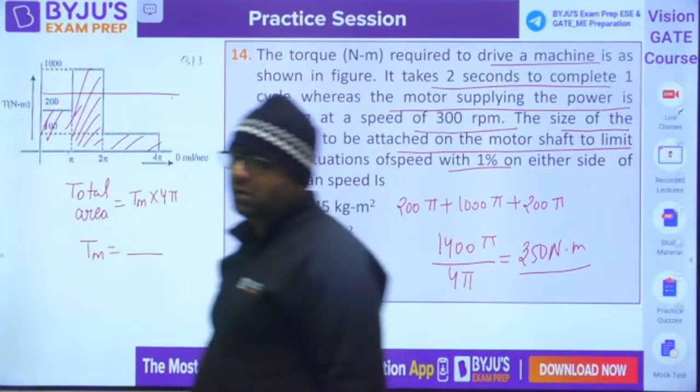Delta E, 1000, this is delta E. 1000 minus 350 into pi, that's 650 pi. Put it in delta E equals I omega mean square C_S, you will get I.

This is 200, this is 200, this is 1000, this is 200. I feel 1400 is correct. 1400 is correct.

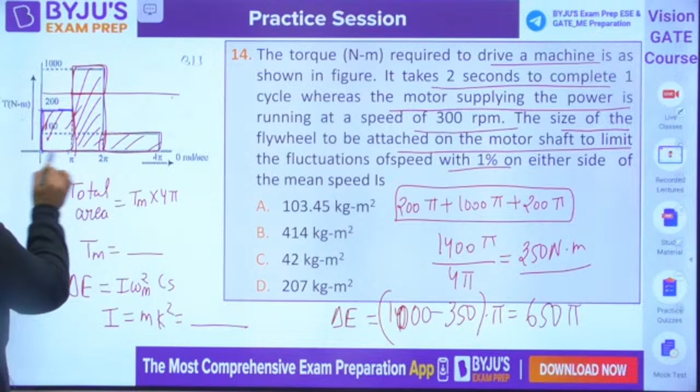200 into pi plus 1000 into pi plus 100 into 2 pi. These three are the areas. So total, I feel these 4 pi to 2 pi. This is 200 pi, this is 1000 pi, this is 200 pi. So I feel 1400 pi is correct.

1400 pi is correct. Then it is 350 Newton meter. Delta E is coming out to be 650 pi. Now you need to keep it equal to I omega mean square CS and you will be getting the value of I.

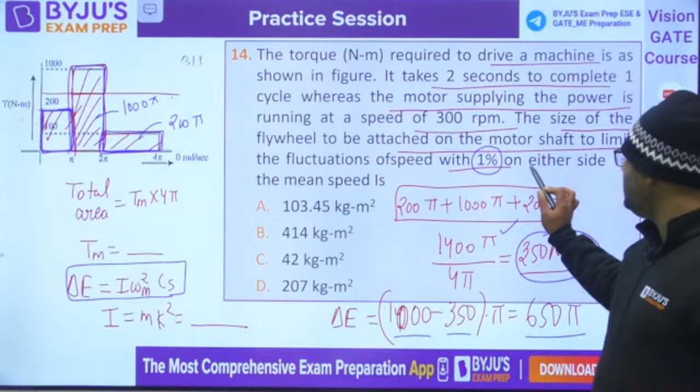So I feel when they have said within 1% on either side, if this is the mean speed, this is omega mean. They are saying 1% on either side. So put the value of CS and get the answer.

Some people are saying 207, some are saying 103, some are saying 414. 103.45, I feel the answer should be.

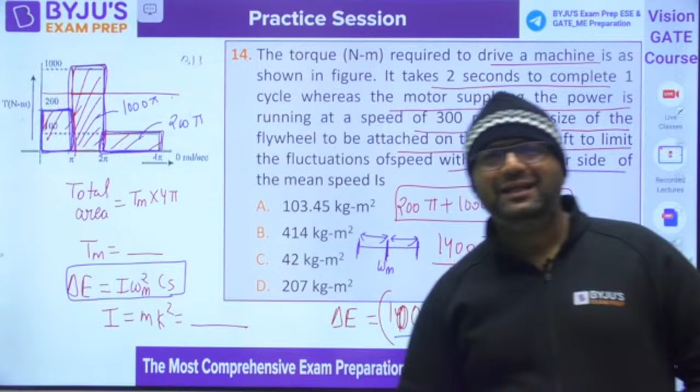Very good, Krishna. Very good, Rohan. Very good, Shreyas. Okay, so guys, this question was from the topic of flywheel.

So if you remember, on that day we have done up to this only, because gear train was not completed. So I have not taken the question from those topics which I have not covered yet.

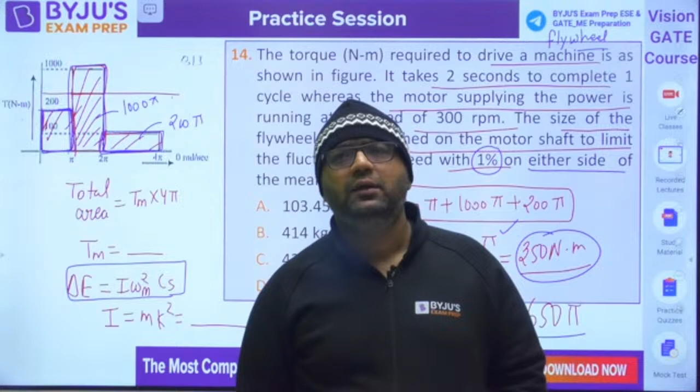Yes, Ram Yadav, I didn't get it, are you asking or telling? Okay, so don't worry, I will do one thing.

Like I have found some students are having doubt in one more thing. Like whenever in the flywheel question, when to take CS as plus, if it is given plus minus 1%, we are taking it as 0.02. If it is given plus 1%, we are going to give 0.01. But sometimes in the language they are writing either-or and all those things.